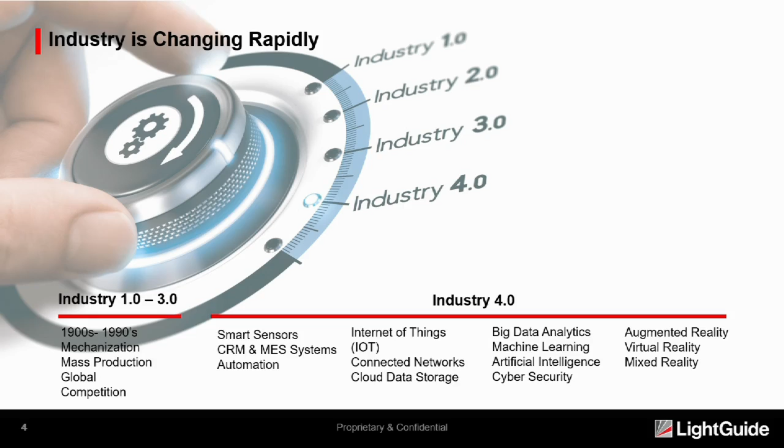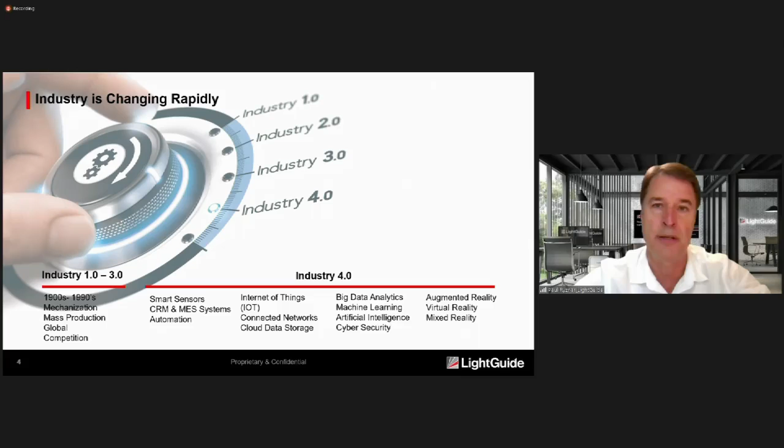In fact, at the event Steve and I sat in on Tuesday, they talked about the difference between some of the top quartile companies from a profitability standpoint and the bottom quartile companies in the U.S. - the spread in profitability has almost doubled over the last 30 years. So companies that are smartly deploying smart technologies that deliver results continue to accelerate their profitability, whereas those that don't continue to get pushed down that profitability scale. Smart deployment of Industry 4.0 is more critical right now than ever before.

So if we go to the next slide and start to dive a little bit into some of the details around augmented reality in general - it's pretty interesting because there are so many articles about different forms of robots and other forms of automation getting deployed on factory floors.

Over the last few years, about 72% of all factory tasks worldwide are still performed by humans. That's expected to go down a little every year, but the bottom line is there's still a tremendous amount of work that will be done by people in factories around the world, and not just factories - hospitals and other forms of work that require people.

Some of the most successful companies that came through COVID were the ones that were the most flexible, able to quickly pivot into different products and volumes based on what was happening during the pandemic. People provide a very flexible solution to react to changing market conditions compared to having a lot of automation. So we really need to work differently now, making sure our manufacturing operations are as flexible and powerful as possible.

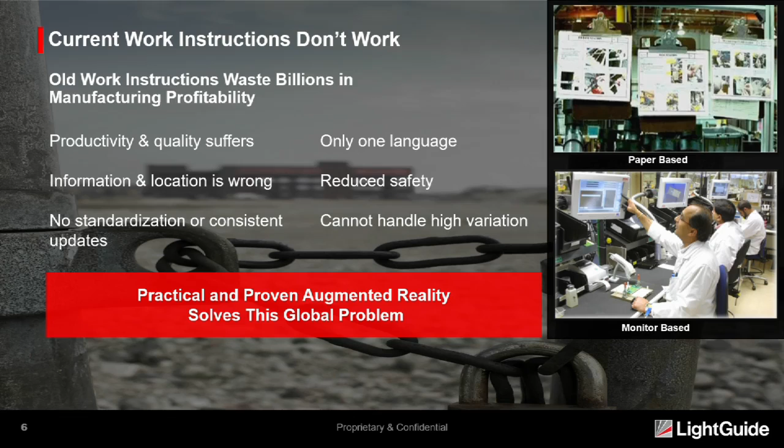We find all the time that the closer you can place the work instructions to the actual work itself - ideally right on the work itself - it dramatically improves quality. In many cases you can drive defect prevention rather than defect detection, meaning the work instructions become so visual and intuitive if placed on the work itself. We'll show examples of that, and quality goes up dramatically. Productivity also increases dramatically.

The defect prevention part of GPS is it's telling you to turn right in 100 yards or turn left in 200 meters. It's trying to make sure no matter where you are around the world, you never make a wrong turn ever again. That's the value of it.

It's not necessarily the value that it tells you after you made a wrong turn that you made a wrong turn - which in manufacturing, cameras, Cognex cameras and others are telling you after the fact that a mistake was made. The whole value of augmented reality in manufacturing, when applied properly, is to make sure from a defect prevention standpoint that you never make a mistake on a manufacturing line again, because the work instructions, even at high levels of complexity, are very clear, precise and timely.

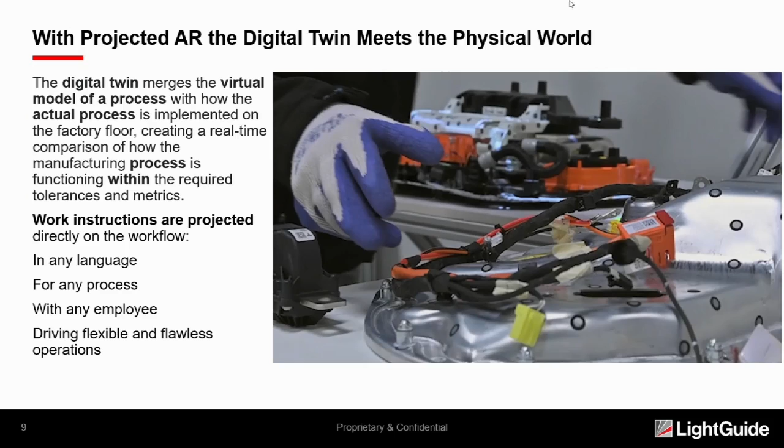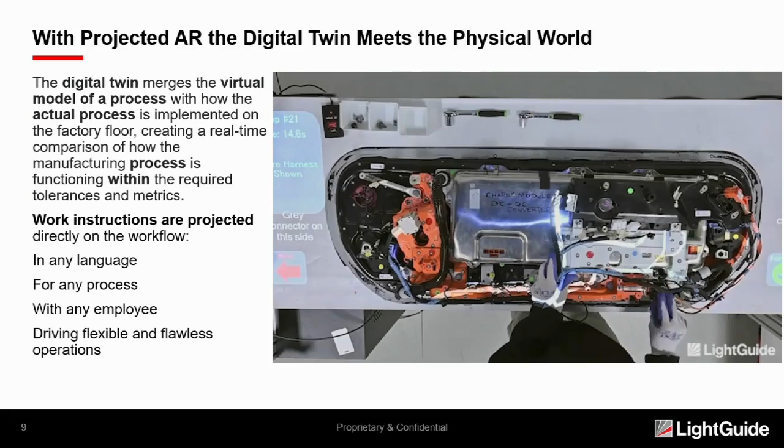This is LightGuide at work in a number of different applications. If you could play the video, there are a number of clips we can show. Here, complex manual processes, in this case building a very critical battery bay assembly for an EV customer, become as easy as following the lights. These are step-by-step work instructions to assemble parts in the right location, so that all 3 shifts now are building in a very standardized way.

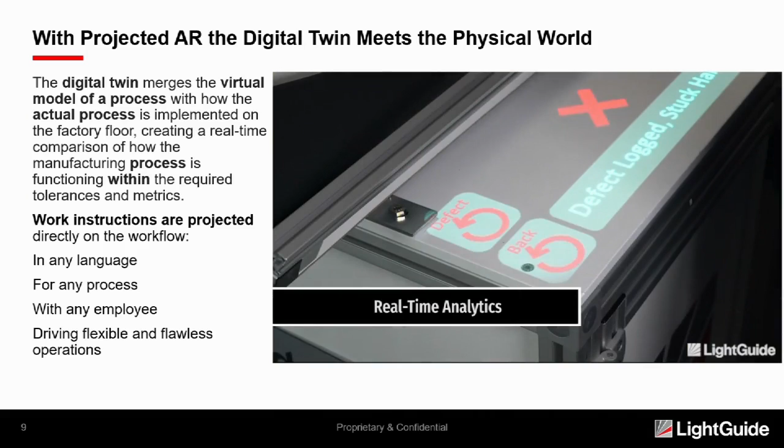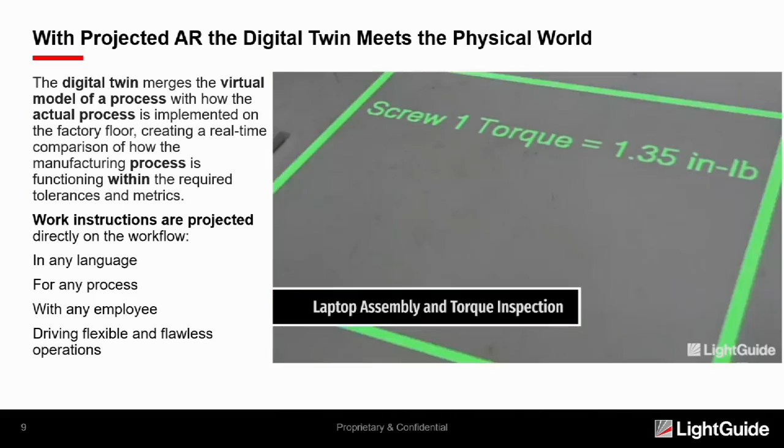Even something like inspection - here we've got multiple variations of a door that need to be inspected on both sides, and those instructions guide somebody to do that in a standardized way. Even running a glue path, as you see here, building a headliner for an automotive vehicle. It's incredible how complex headliners in vehicles have become over the last 20 years, with different types of cameras and wires that need to be assembled. A technology like LightGuide can help make that happen.

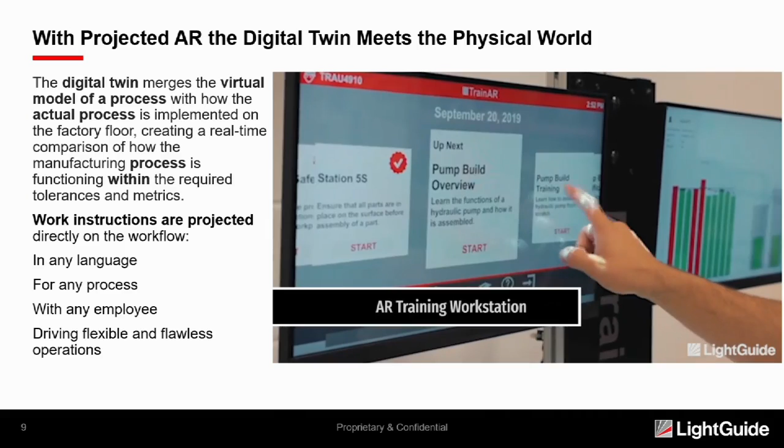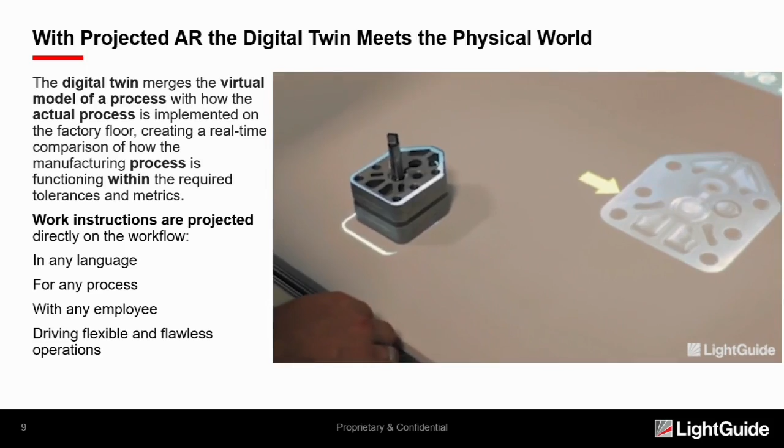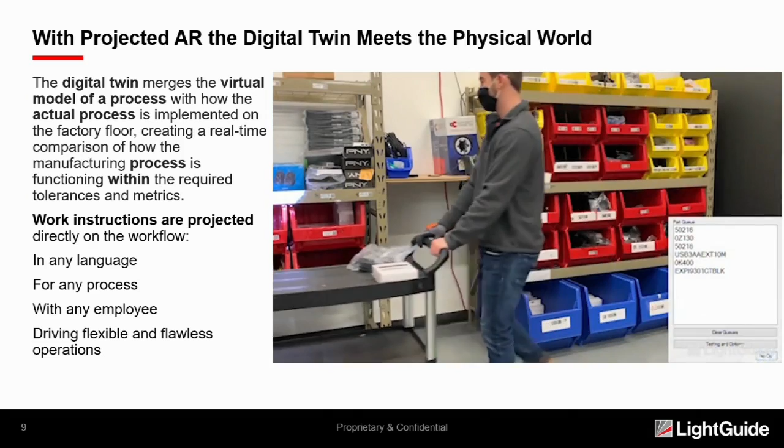Torquing, in this case building a laptop, becomes super important to make sure it's done correctly, as it always has been, but by following the lights it can be done very accurately. Whether it's laptops, doors, or in this case part kitting and sequencing with millions of combinations of parts and quantities that need to be kitted in a just-in-time process in a factory to make sure they're properly sequenced, technologies like LightGuide can help manage literally millions of combinations of variations.

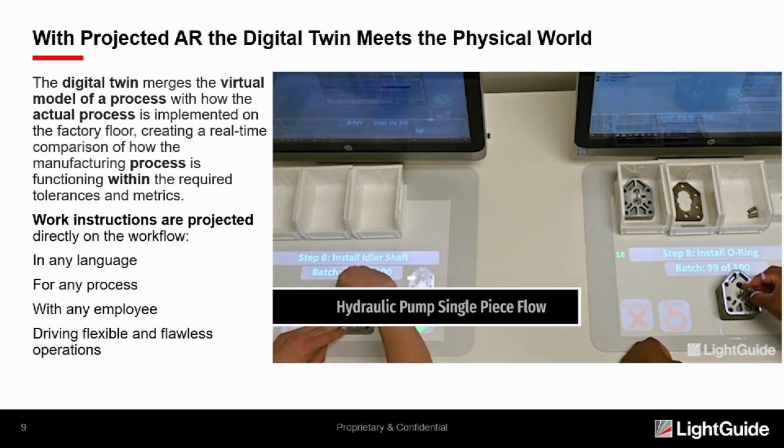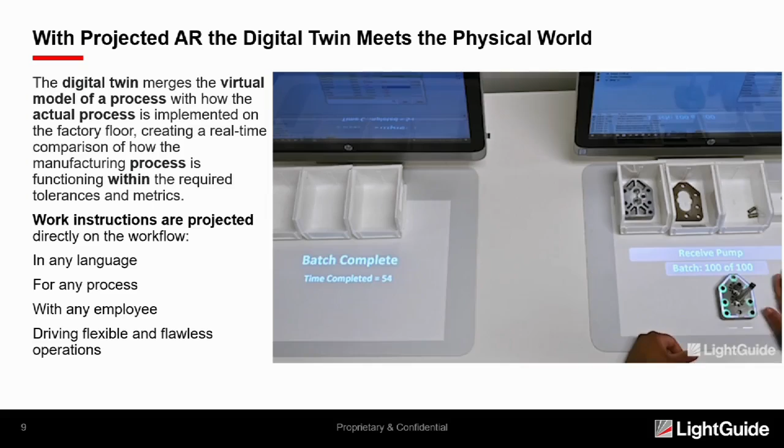As you just saw, it's very easy to program. Many of our customers are trained to do authoring of the work instructions. On an assembly line like this, it can actually drive one-piece flow, as you see here. So this is just a number of different videos of LightGuide at work.

The key takeaway is it really doesn't matter, as we like to say, whether it's pizzas, pacemakers, or powertrains - augmented reality can really help drive process optimization. These are the results many of our customers are actually receiving compared to when they were running with paper or monitor-based work instructions: 90% improvement or more in some cases in quality, 50% or more improvement in throughput and productivity, and a 30% or more improvement in training effectiveness.

As Rick was mentioning earlier, and Steve, about a physical twin and a digital twin - the digital twin is great, but if it doesn't actually have a physical twin on the factory floor, it breaks down pretty quickly. Technologies like LightGuide can help make sure that if you've modeled an assembly line in a digital world that needs to meet a certain takt time and quality metric, a physical twin on the factory floor with a technology like LightGuide can truly help make sure your digital twin has a physical twin on the factory floor.

We've also got the ability, as you saw in some of those videos, to apply augmented reality across almost any manual process that exists, whether it's assembly and inspection, training, part picking and kitting, maintenance, distributed manufacturing, or even digital work instructions. In a factory, if it's deployed correctly, it can really drive dramatic improvements in quality and productivity.

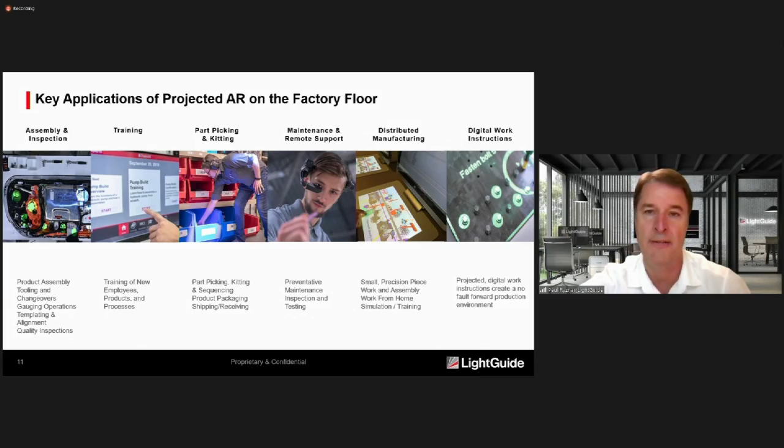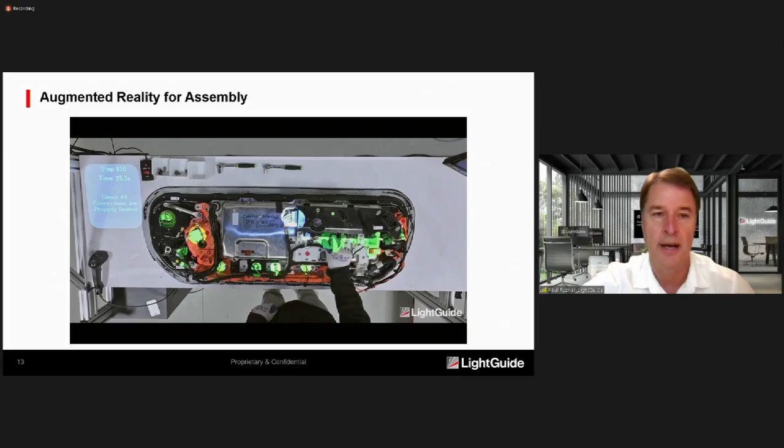We've also got a number of videos on our website that show these types of workstations at work in manufacturing environments. If we move on to the next slide, this is another video. If you would not mind clicking on it, I'd appreciate it. It shows a little more detail around the ability to guide step-by-step work instructions.

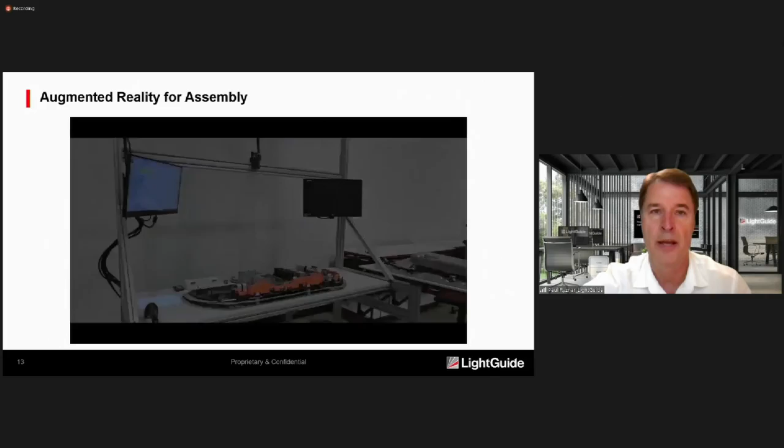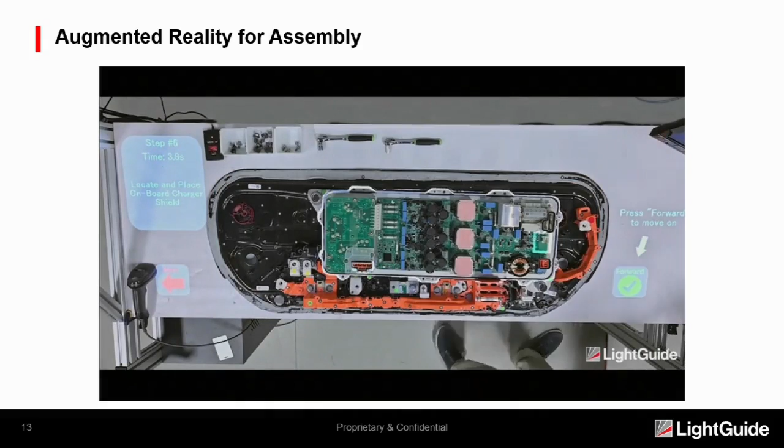One of the key points on this particular one involves the fact that unlike any other work instruction technology that exists today, this actually allows what we would call a layered audit process. In other words, the ability, as we're watching this video together, to be able to see very quickly that the employee is actually doing the work that the work instructions require.

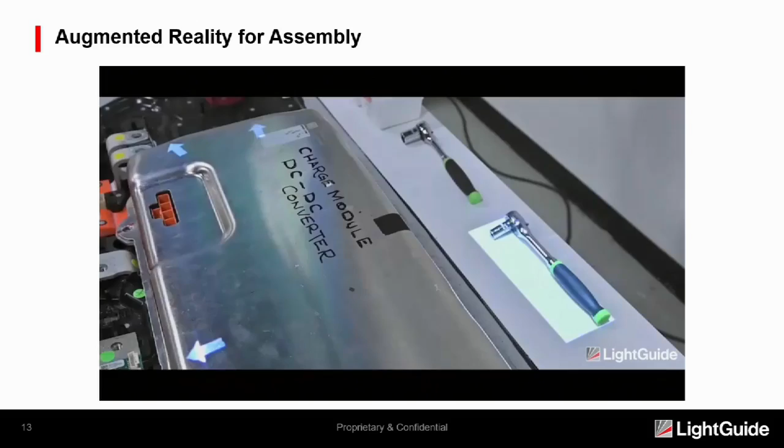So at a glance, you can watch somebody doing work for 30 seconds, 60 seconds, if you're a team leader or a supervisor performing a layered audit on a factory floor, and very quickly see that the employee truly is following the right work instructions.

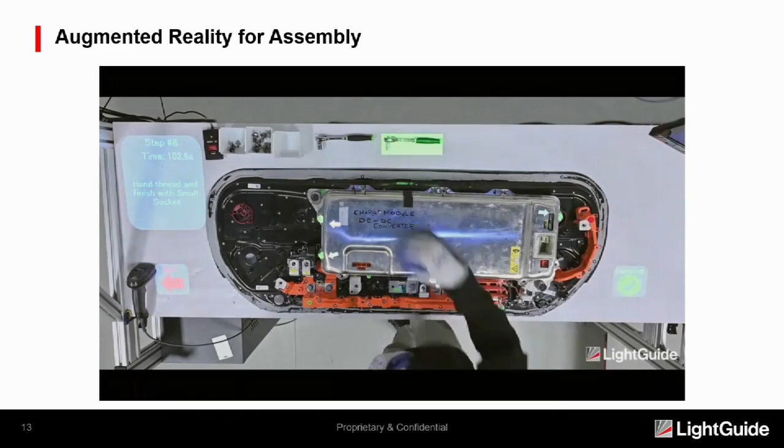That layered audit capability with LightGuide is something that customers really value because it's difficult to really understand if the employee is doing the work, if they're working off of monitor or paper work instructions, or even quite honestly, off of a wearable or a tablet.

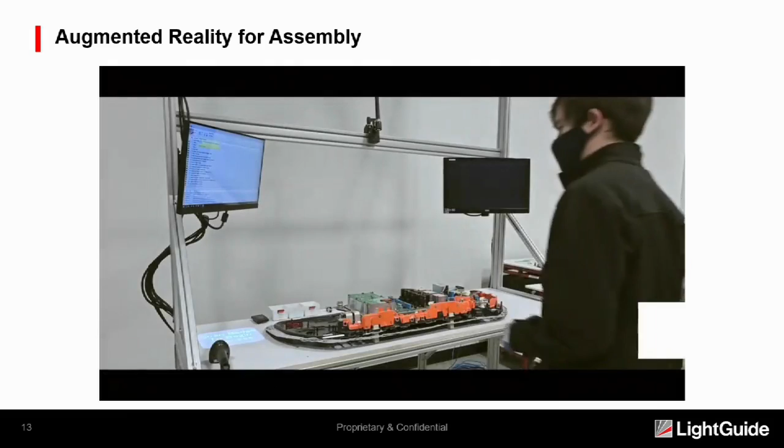This is actually a system that can self-train employees on every step of the process. You can see that particular one on our website, where it can drive, in many cases, a 6-week return on investment, because it's training people on the very best practices from the very first cycle that they run. And in many cases, you don't need people training people anymore. LightGuide and other forms of AR technologies can train them.

We're also hardware and software agnostic. In other words, we want to be able to fit in with a company's current standards on their manufacturing floor. So if you're running dashboards already that allow you to see how your automated processes are running on a worldwide basis, the analytics that LightGuide can help provide into your overall worldwide process optimization allows you to see now what both your automated processes are doing as well as your manual processes.